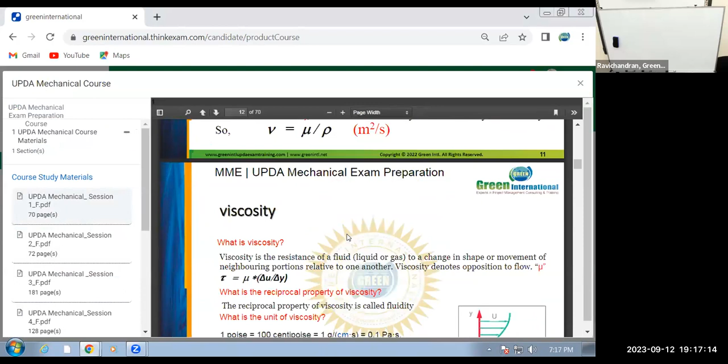The first section is my course, where all the study materials are. For mechanical, we divide it into 5 sessions of theoretical review covering all the fundamentals - mechanical fundamental review. You can open and read it straight away, just run through it quickly so you're familiar with all the fundamentals.

Just click Google... just type... let's see... I think this one, this, like, okay, enter... go up.

So you have 5 presentations for mechanical, and 1 presentation for PMP. This one I will cover next week. The first part is understanding the project management principles, and there are about 50 questions in the presentation. If you are thorough with these 50 questions, you will be able to clear all the PMP questions. PMP questions you will get between 3 to 5 per mechanical, maximum 7 questions.

The second part is mock test, where you have all the mechanical tests. The mechanical test is divided into 2 sections. One is the most frequently asked questions, which most people get - we set these as VIQ questions. There are about 19 to 20 VIQ tests. Then apart from that, there are other tests.

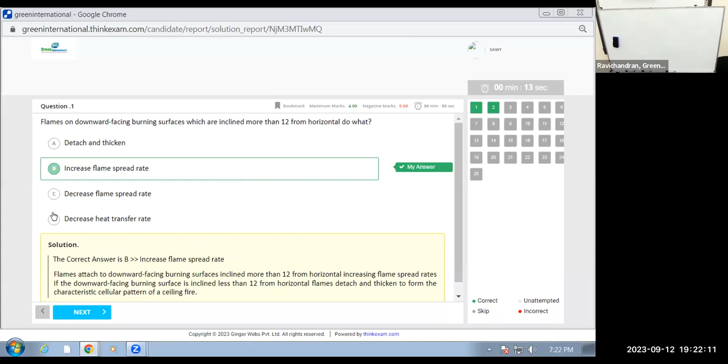You should not miss any attempts. You must understand that these are not the same questions in each attempt, so you must practice all the attempts.

Documents, you don't have anything. Videos, say we finish the class today, tomorrow morning your video will be uploaded here so you can watch and review the sessions. As soon as the class finishes, if next day you review what we discussed, it will stay in your mind. This will help you answer even some questions that aren't from our pool of questions. We should prepare ourselves.

You can also use 2 applications, a mobile application for Android and iOS. You can install it, and when you install it, it will ask you for a URL. You click this link to install it. When opening in a web browser, clicking this takes you to the web application. Download the application on mobile, it's easier for you to do the mock tests, and watching videos becomes easier too.

It will ask you for a URL. In the URL, just enter Green International, all in small letters, as a single word. Then it will go to our login page, where you put your username and password to log in. So all the provisions are available for you. Any doubt on this?

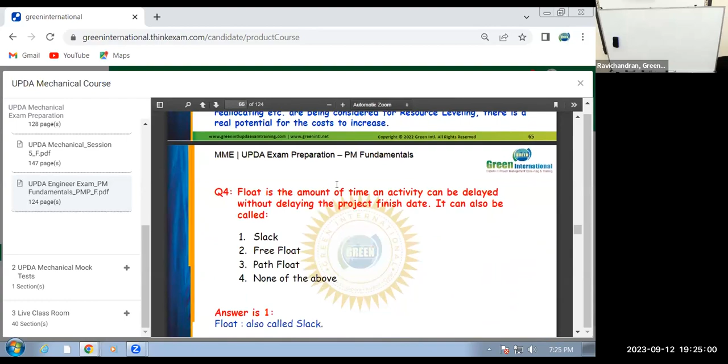I'm only covering the areas where they ask questions. That's all I'm covering. Of course, if you want to fully learn project management, there's a separate course, the PMP course. When you finish UPDA, you can join the PMP course, which will be full learning of project management.

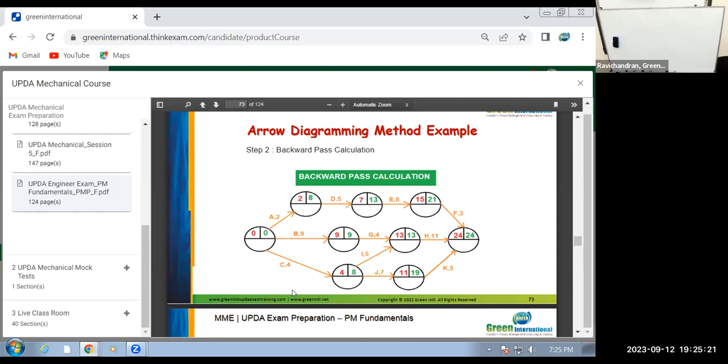Okay, now let me ask Mr. Irshad to give you a brief on the 3 workout classes and how he is going to conduct them.

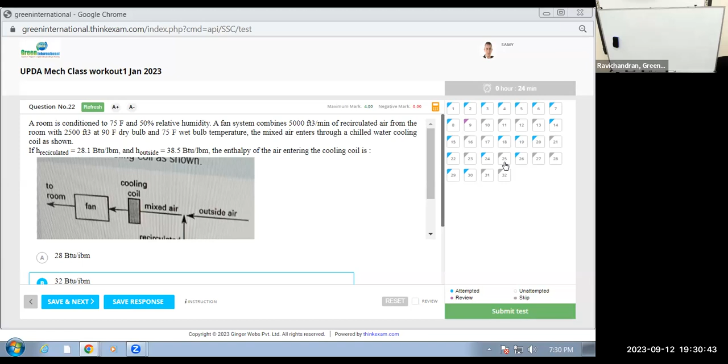Each question you can attend like this, and if you have any doubt, you can mark it for review. When you move to the next question, it will mark in a different color. Even in the exam, the color may not be the same, but there will be some color pattern that helps you review so you can come back to questions directly without scrolling through all of them. If you have any doubt, you can mark it for review and come back directly to that question by clicking here.

And the calculator - we will discuss the calculator in our practical sessions when we take the practical sessions.

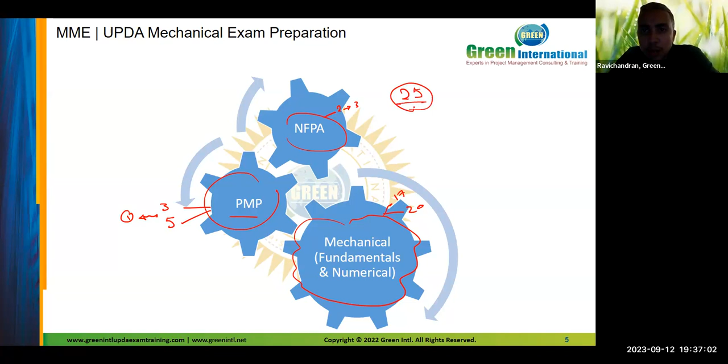So as we discussed, the 25 questions, this is the total number of questions. It should be solved during 1 hour. We need to pass with 50% - 50% of the questions, which means more than 13 questions, 13 and above, and you have passed.

Whatever grade is required, from training up to grade A, the grade is not related to the number of questions or the degree for the exam. It's just pass or not pass. The grade is dependent on experience and so on.

So here we need to focus, at least go to the exam relaxed, happy and easy to go to the exam, not stressed, not terrible about the exam - to be easy, on the safe side.

At least make a practice and study to at least 75-80% in an easy way.

So the structure of the exam, as Engineer Irshad discussed in the presentation at the beginning, describes the simulation website for Green International about the exam structure, number of questions, how to solve the exam, what about the monitor in the exam, the buttons for the questions and so on. This is all already described in the simulation website of Green International.

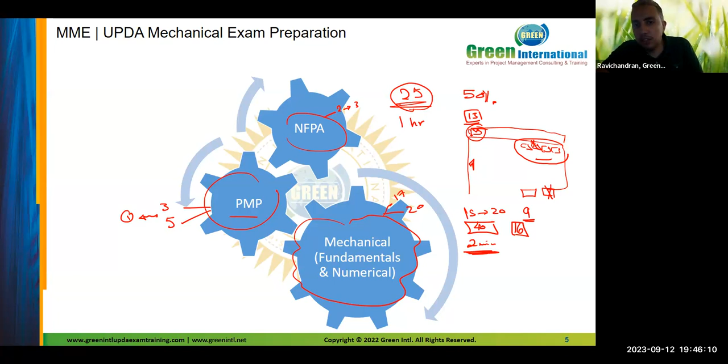What are the topics we're going to study? We study fluid mechanics, one of the important topics in the exam, and we study everything about fluid mechanics, making a refreshment of everything related to it.

We start with terms and definitions: viscosity, vapor pressure, gravitation, surface tension, all properties, pressure, its meaning, and all devices related to pressure - differential pressure meters, types of fluids.

We classify all fluids according to different classifications: laminar and turbulent, viscous and inviscid, steady and unsteady, uniform and non-uniform - everything causes confusion for theoretical questions.

Continuity equation, Bernoulli equation, energy, head losses calculation - this is the important part related to numericals, especially for continuity. Nothing in the exam without continuity - this is like a built-in part of the exam.

Head losses calculation, buoyancy force, bodies stability. Some numbers we study here like Reynolds, Mach, and Froude number - we add some numbers, but this is another topic for heat transfer. Intensive and extensive properties.

Then we go to a topic related to fluid mechanics but more specific - pumps, very important, especially for theoretical and numerical. These two topics are top important for both theoretical and numerical.

Pump classifications here, like dynamic and displacement, pump selection curve, series and parallel pumps, net positive suction head calculation, volute and priming, and so on. Some definitions related to pumps, pump efficiency, and affinity law.

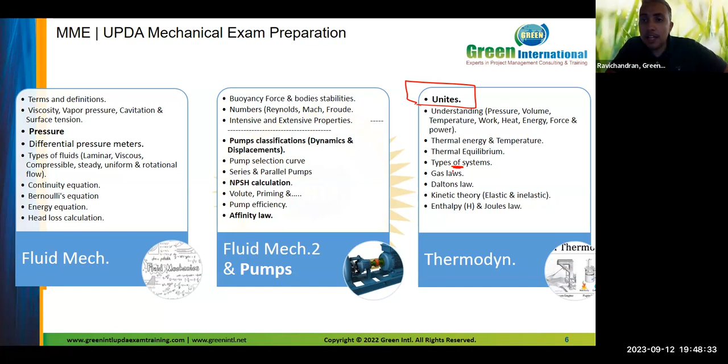Gas laws, Dalton's law, kinetic theory, enthalpy and Joule's law. We continue thermodynamics with the general gas constant and Avogadro's hypothesis.

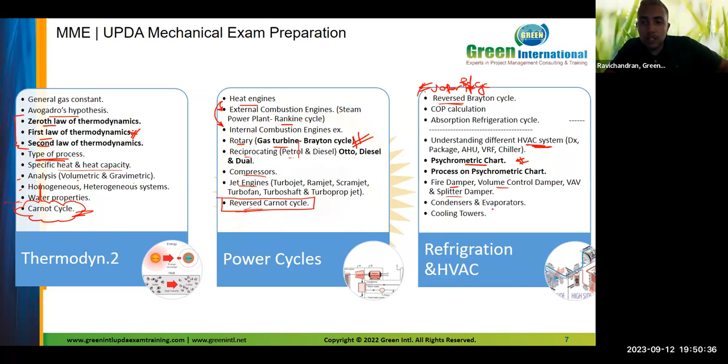Then going to the HVAC topic. Here we're going to understand the different systems of HVAC. Psychrometric chart, very important for the theoretical part, and the process of the psychrometric chart. And this includes the meanings of different dampers - fire damper, volume control dampers, splitter dampers, VAV, condensers, evaporators, cooling towers - this is a part and comment related to HVAC.

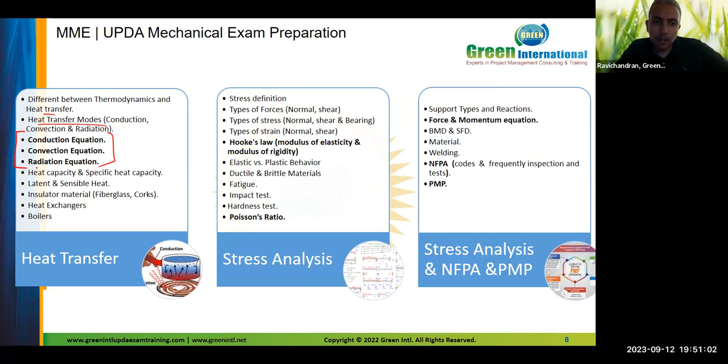This is the numerical part for this topic. We also have a small part related to numbers, like for example Prandtl number and Nusselt number, heat capacity and specific heat capacity, latent and sensible heat, insulator materials, heat exchanger, and boilers. Also for heat exchanger, it is very important for the numerical part.

As for the equation, it may not be here in the presentation, but it will be applied with practice sessions with engineering research. For stress analysis, here we'll focus on stress definition. This is a total shift from the mechanical power engineering topics to the production type.

Stress definitions here: types of forces, types of stresses, strain, and here going to Hooke's law, very important. Elastic versus plastic, ductile versus brittle, fatigue, impact, hardness, just for the theoretical part, and Poisson's ratio.

Support types and reactions, very important especially for the numerical part. Force and moment equations, this is related to support also, and both are important combined together. Bending moment diagram, shear force diagram, material, some questions related to material and welding.

The last two topics are NFPA, as I discussed with you at the beginning. This NFPA here, I tell you, just focuses on two types of questions: the code questions, and I will show you what we mean, and the frequent inspection and testing for some equipment.

For the PMP part, it will be covered with Mr. Rafi. So actually it will be with you here for the mechanical study.

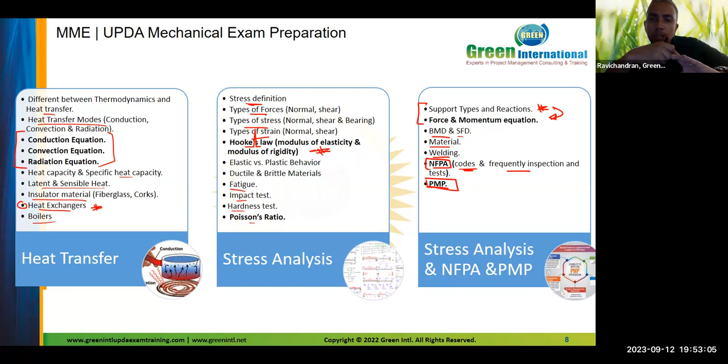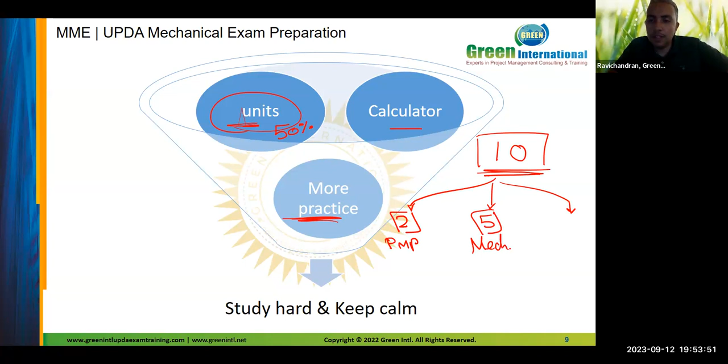So finally, I tell you the structure of the sessions. We have 10 sessions divided into 3 parts: 2 sessions for PMP, 5 sessions for mechanical topics, and 3 sessions for practice problems, you can say the exam.

Okay. Any question? Any doubts? Okay, doctor, fine.

Okay, we'll start inshallah the first session. This is just the intro session, it's not counted as one of this set of sessions. So the first session will be inshallah coming week from Sunday. The first 2 sessions will be the PMP session, and after that we'll start for mechanical.

This mechanical sessions will be mixed between online classes and in-class sessions. If you need to attend online, it's available. I will give you part online and part in class. During the in-class session, you can attend in class or online as you wish, because I will be in Doha for this time, for this batch.

And finally, here we end by the practice after we finish the mechanical part. Practice about all topics related to fluid mechanics, heat transfer, for refrigeration, as Engineer Irshad described with you at the beginning.

So if you have any question, we are ready. Any questions you want to ask him? Okay, doctor, thank you. I'd like to thank you again. Thank you, Mr. Rabi. Thank you, Engineer Irshad. Okay, doctor, thank you very much, we can end the meeting.